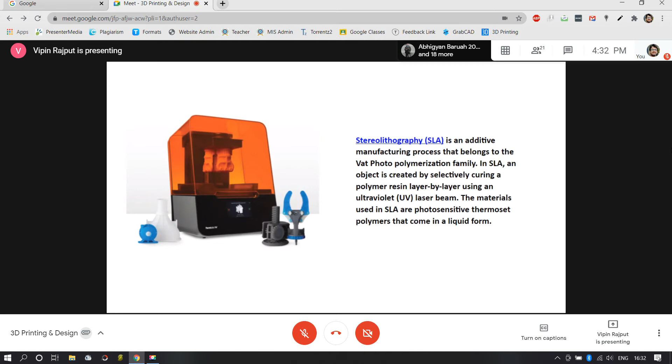Okay, move to the next slide. So there are three types of this technology. The first one is called DLP, or digital light processing. The second one uses a laser, and the third one uses an LCD screen.

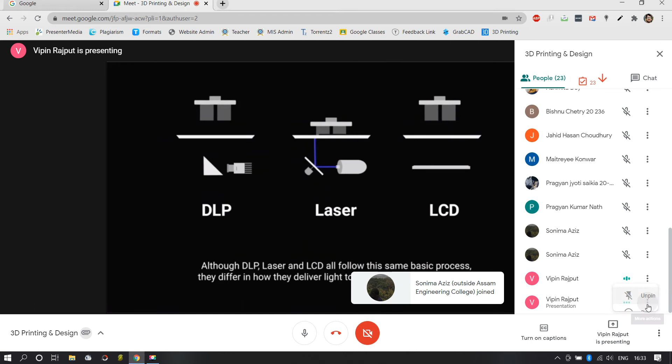If you see in the middle is Formlabs. Formlabs is the second technology, and that uses a laser. It's the same principle. There is a build plate on top. It goes down to the vat plate, where the laser cures the resin, and the part is formed.

The third one, the new machine you see, uses the new LCD screen technology. The same thing happens as with a projector or laser, but here the LCD screen makes the image. We use the pixels of that screen to mark the resolution. If you have a regular pixel display, you get a little less resolution, but nowadays LCDs come with 8K, 4K resolution, which is very fine. So sometimes it's better than a laser or a DLP.

Back to the presentation. So when we talk about the next generation of SLA technology, all these technologies have something common: when the resin tray, the build platform, goes down and resin is cured, they need a little movement to pull back the part, and sometimes that movement is not very precise, and the part will stick to the bottom of the plate. Hence it's a print failure.

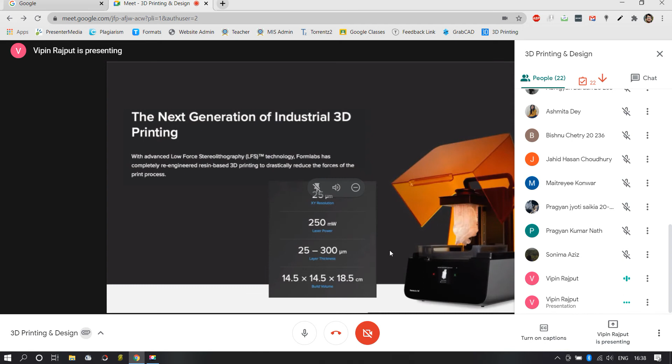We were saying that we have three types of technologies in VAT photopolymerization. When I say VAT photopolymerization, that means the particular process of SLA - a particular phenomena, a particular technology. So we'll begin with DLP, laser and LCD. These are the three of them and we'll study about them in detail.

It is common in FDM, in SLA, in SLS, or in DMLS. So whatsoever the technology may be, additive manufacturing is totally about stacking of multiple layers one over another in order to form a component.

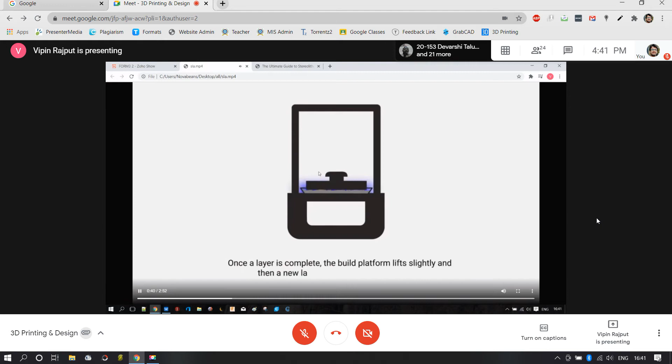So hereby you can see the basic difference as well as the only classifying factor between the three technologies in VAT photopolymerization. First we have DLP, digital light processing. Second we have laser, and the third we have LCD.

In case of DLP, what happens is we have a projector similar to that in a cinema theater. A beam of light is thrown from the projector to a mirror, and through that mirror, light is rerouted to the vat where the resin is poured, and simultaneously the composition takes place. So the source of light will be a digital light projector that throws light on the mirror, and further the formation takes place.

What happens in laser is we have a specific point size laser that gets rotated by means of galvo mirrors, and formation of the particular part takes place. Whereas in case of LCD, we have an LCD screen like mobile phones have - the light illuminates and the part is formed over the build plate. Everything in detail will be shown to you in this video itself.

Yeah, so was this clear? I mean, this particular video might have made you familiar about all the three aspects, right?

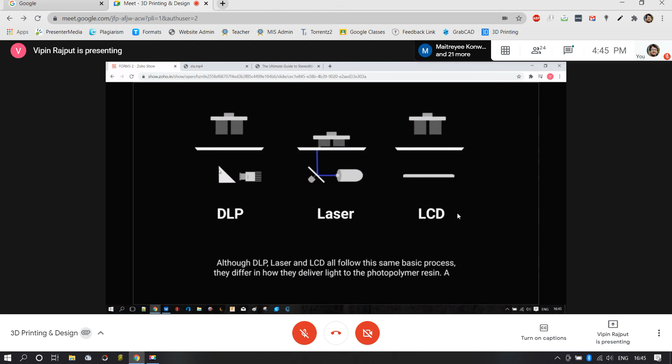Okay, so as we were saying, there was a major difference between the three - the DLP, the laser and the LCD thing. In this particular video you might have seen the basic difference, how the DLP process goes and how the composition takes place, and simultaneously for the rest of the two. Moreover, we'll study about the laser thing a bit more in detail, specific to a particular product. So I'll show you one more video, and thus we'll complete this particular presentation.

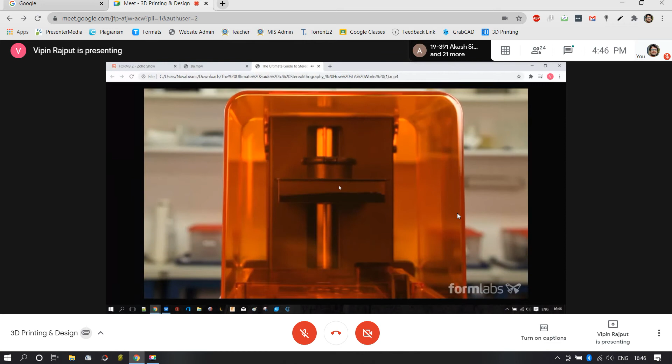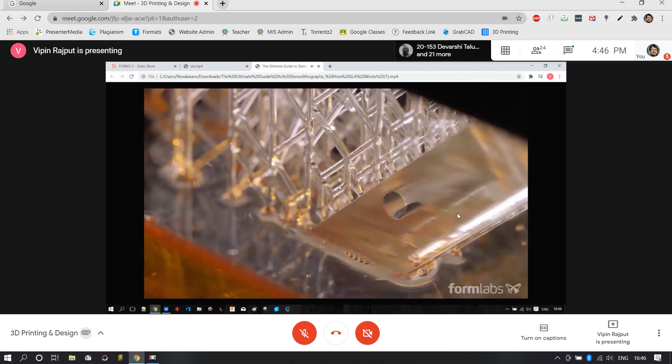Galvanometers direct the UV laser to the transparent window at the bottom of the resin, drawing a cross-section of the 3D model selectively hardened. The print is built in consecutive layers, each less than 100 microns thick. When a layer is complete, the part is peeled off the bottom of the tank, letting fresh resin flow beneath, and the platform is lowered once again.

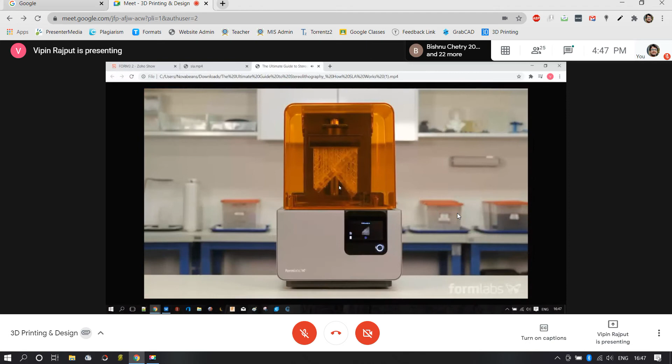Originally developed in the 80s, SLA was confined to large industrial machines until recently. Today, desktop stereolithography offers affordable, high-resolution 3D printing that fits conveniently in your workspace. SLA allows for the use of a wide range of materials with diverse physical properties. Whether you're an engineer, product designer, sculptor, jeweler, or dentist, there's a material for your application.

From this particular video, it might be more clear about the laser phenomena, how laser working takes place, and how vat polymerization through lasers takes place, right? Yes, sir. Yes, good. So we'll start off. We'll begin with the particular presentation. So we were talking about some of the aspects in vat polymerization process. So we'll just talk about some of the parameters.

So comparatively to FDM, SLA offers you a much more detailed print, simultaneously a lesser layer resolution. Okay. So when we say layer resolution or the X, Y, or Z axis resolution, that basically means the precision a particular machine or hardware is capable of giving you in a specified dimension, right? So when it is written over here as 25 microns in X and Y, that means X and Y resolution is 25. So in either X or Y direction, a feature of 25 microns is capable to be drawn by the means of laser. And further, its thickness will define how that particular feature will be propagated.

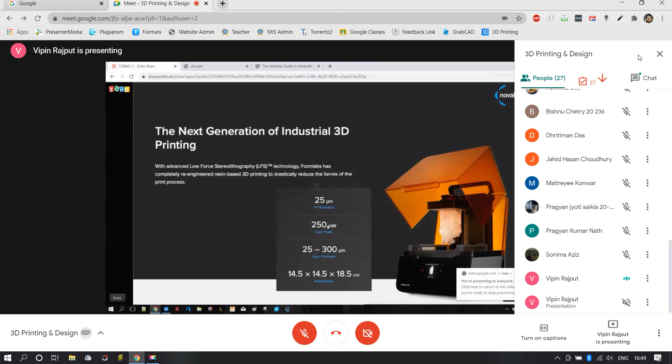Okay. Further, the equipment, as I showed you in the particular video, I'll just show you once again. Yes. So you can see just at the back of my side, this particular machine. So this is Formlabs, and this is an SLA based machine. And in the SLA based machine, the laser power is 250 milliwatts. That means a very low intensity laser is responsible for constructing the models. But the intensity of the laser does not define how critical or how geometric or how good the aesthetics offered from a particular machine can be.

And simultaneously, we do have n number of additional features available in this particular equipment. So layer thickness can be varied from 25 till 300 microns. But comparatively in FDM technology, you do have a greater provision. That means you can vary from 25 microns till 2000 or 3000 microns. That is 2 mm or 3 mm.

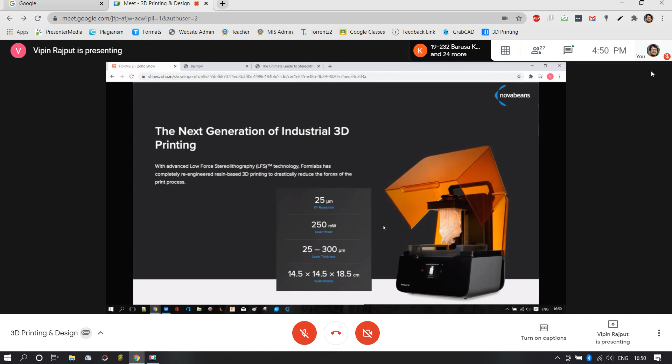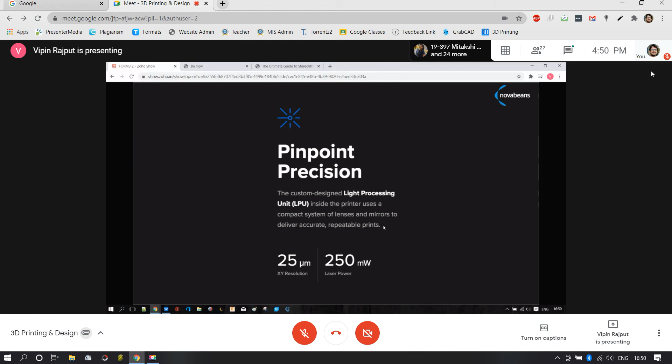Okay. Comparatively, the build area of SLA machines or DLP machines or LCD based machines, any of the vat polymerization processes, is comparatively low when we compare it to FDM or any other process. That means we do have a specified build area. So very complex geometries, very intricate parts are supposed to be generated through this technology. Yeah, as mentioned, the pinpoint precision, that means 25 microns is the XY resolution, and simultaneously the laser power is 250 milliwatts.

So this is how the entire construction happens, and there are mainly 3 accessories responsible for the construction of a model. So we do have our vat tray, our resin tank where we pour in the resin. Then we do have our build platform. This is the region where the model gets constructed. And at the back side of the machine is the dispensing cartridge, which actually holds the vat photopolymer, the liquid. So our process is very simple: design, print, and then post process.

So okay, I'll just ask you a question. Any one of you can answer this. So in case we design something and print it in FDM, as soon as the model is completed from the printer, what is the next step we will do? Any one of you can answer.

Remove the supports. We remove the supports. Okay. Then further? If it needs, we can do some sanding. Okay. So a similar kind of thing is being followed here also. I mean, you were exactly right.

So when we print something, let's say a particular model of ours is designed, we simply export it to the particular machine after slicing. And as soon as the print is completed, in SLA technology a bit more intricate post-processing is required. Okay, so we'll talk about it, but our operation goes like: design something, you have the STL or the OBJ file with you, your part is ready to be printed, it does not have any non-manifolds or glitches in it. Further, you are welcome to move your design to the printing portfolio.

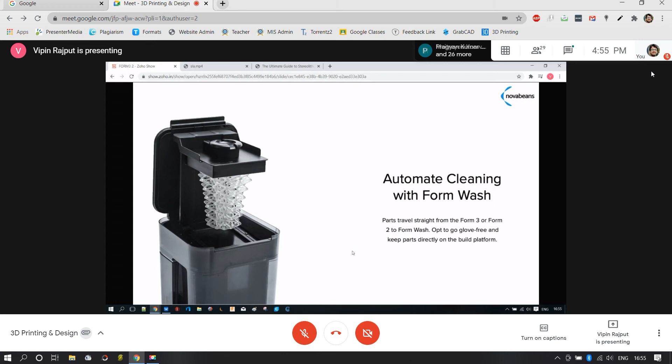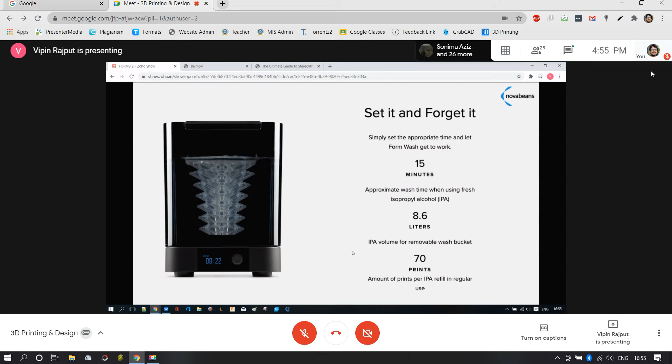So we do have a particular container, an automatic container. Whatever is printed, you can simply put inside the chamber, which has motors that create a swirling effect, and the part gets washed automatically. These are some of the specs of that container; I'll not go into detail about the specs. Further, we have a UV chamber where you can set the temperature as well as the revolution, that means how long it should rotate and cure the model, and thus it will yield a good quality print. Okay.

So, was this understood? Yes, sir. Yes, sir. Okay, so if any one of you has any queries, please feel free to ask.

So shall I proceed ahead? Yes, sir.

So I'll show you the interface of the slicing engine of SLA, what the interface is, and thereby what operations you can do over it. Okay. So this is how the platform of an SLA based machine looks like. This is the grid which shows you the printable area. Anything lying within this range can be printed. Anything exceeding this range cannot be printed.

Okay. So I'll just tell you what this software is. This is PreForm, the name of this slicing engine, and this is by the OEM Formlabs. Almost 90% of the manufacturers for SLA technology have their own slicing engines. But in case of FDM, it's not the same. 90% of the machines run on a single slicing engine, that is Cura. So you all might be familiar with Cura, right? Yes, sir.

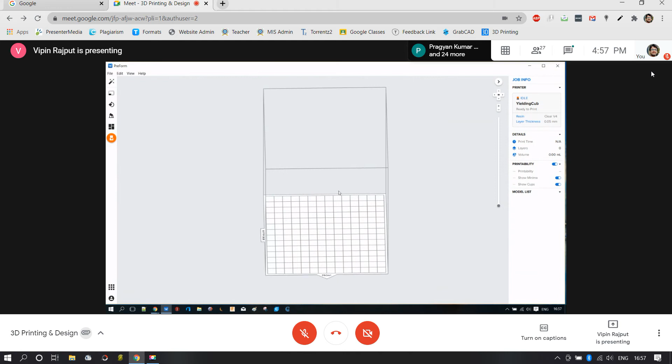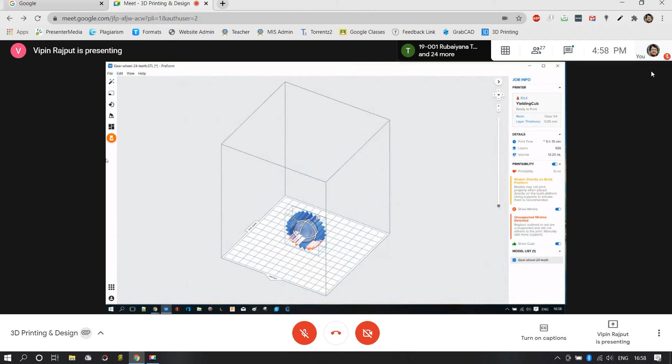Okay. So the operations are almost identical to what we use in Cura. The first thing we need to do is choose the location of the file. So I do have a particular model with me. Okay, let it be a gear. So the first and foremost thing you need to do is import a model. You can simply drag and drop the model, or you can choose the location of the model in order to make it visible over the print screen.

Then the second thing is to choose the material. As I said, the machine has n number of materials based on the application. If we may be casting it to make it an aluminum or iron type of compound, we can choose any of the castable materials. If this needs to be a biocompatible or biodegradable kind of compound, we could choose any of these two. Further, varying upon the application, we have n number of materials available. So I'll just choose any one of them.

Let it be black. Right now we have provision of printing at 3 different layer heights: 25 microns, 50 microns, and 100 microns. So we can print this model at different layer heights. Simultaneously, that will define our time too.

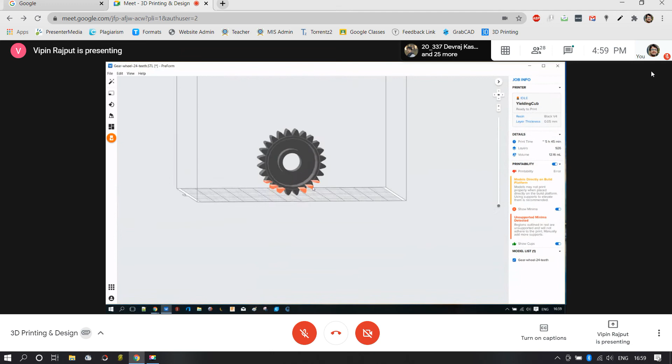Okay. So as we chose that parameter, here you could see some red marks, which show the overhang. If a model is not subjected to any kind of supports, it will fall. It gives us an indication that we need to provide supports. This is the same thing that happens in Cura. Even in Cura, if a model is overhanging, it will show you a red region. Am I correct? Yes, sir.

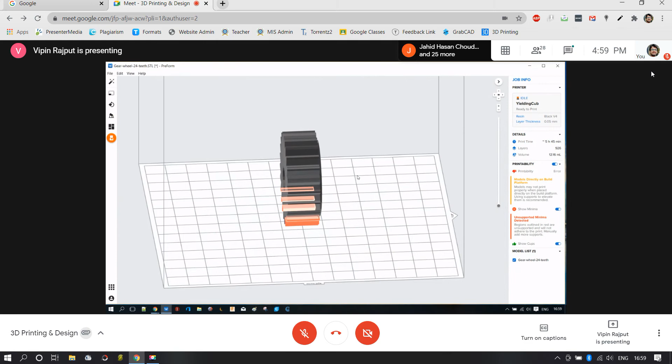So first thing is to import a model. Then we choose the material in which we want to print, and then choose the appropriate layer height. So let's say 50 microns was not even required for this. I'll not tell this. You guys let me know what should be the appropriate layer height for printing a gear. Is it required to print it at 25 microns or 100 microns, or will 50 do the work?

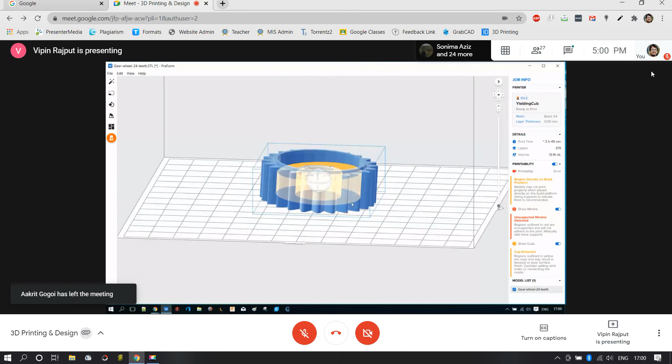Hello? Yes, sir. Yeah, I could see that 28 of you have joined, but okay, no worries.

So basically, the layer height totally depends on the aesthetics required in the model. When we talk about a gear, 25 microns is not at all required. Even 100 microns will do our work, right? So we'll choose 100 microns, and that will save a lot of our time.

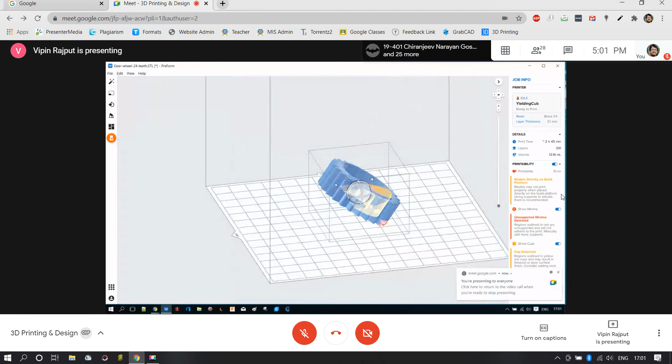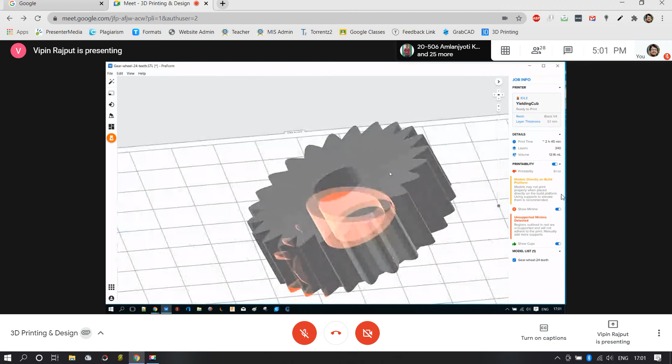So after choosing the material and the appropriate layer height, the third thing we need to do is orient the model in such a way that it may be formed properly. Simultaneously, it should not have a big quantity of supports generated on it. So the other parameter will be to choose the orientation of the model. If you feel comfortable with the disk to choose the orientation, you are most welcome to use that. But if you want to choose a particular base, we have n number of features available here too.

This is for scaling the model up or down. In case of SLA, you can scale the model uniformly. As you might have done in FDM, you could actually scale the model non-uniformly, meaning you can change either of the directions. But in case of SLA, it is compulsory to do uniform scaling.

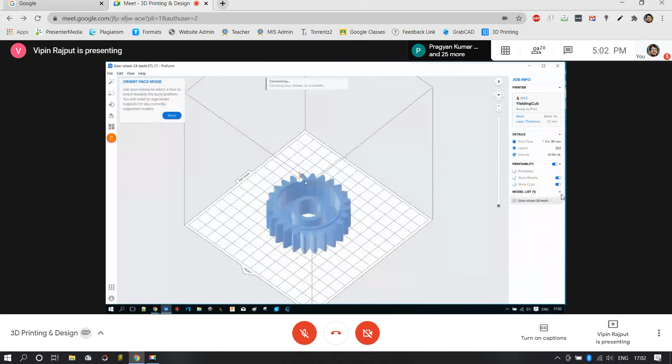Okay, so in case you don't want the scaling to be done, then you can actually design the model as per the dimensions you need. Further, we can choose the particular face on which we want to print this model. So let's say this is the appropriate face for me to print the model. Okay, so my model is something like this.

Okay, and further I'll just choose. So this particular feature is for scaling. Then this is for choosing the orientation of the particular box. Then this particular feature is for generating the supports. So let's say we are creating a full raft. Simultaneously, the touch point size will be 0.6 mm. Okay, so we'll just generate some kind of supports, and thereby we'll see.

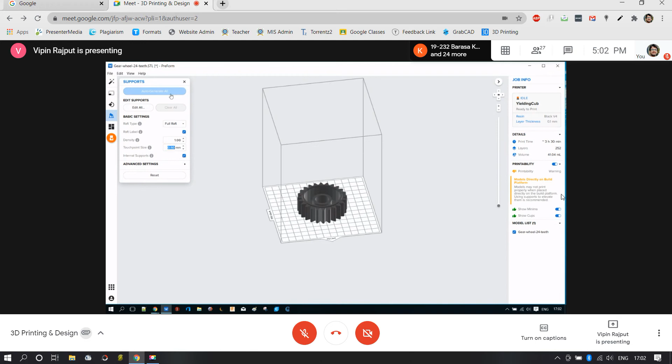Okay, so this model will take 4 hours and 30 minutes to print. Total number of layers will be 322, and the volume of resin utilized for the construction of this model is 51.28 ml. Okay, so when we say 322 layers, we'll just see the layer view for each and every layer. So this is how the construction of the raft takes place.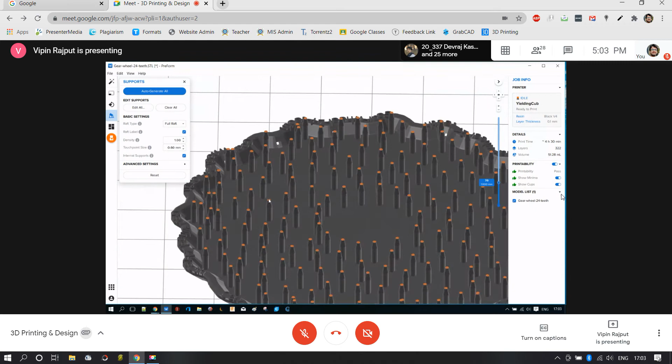So it will be very easy for us to remove the model from the platform. In case we had chosen something else, this would have caused us some problem. Generation of supports is happening like this, and the moment the part comes into existence, that means the point at which the initial layer of the model will touch down on the supports.

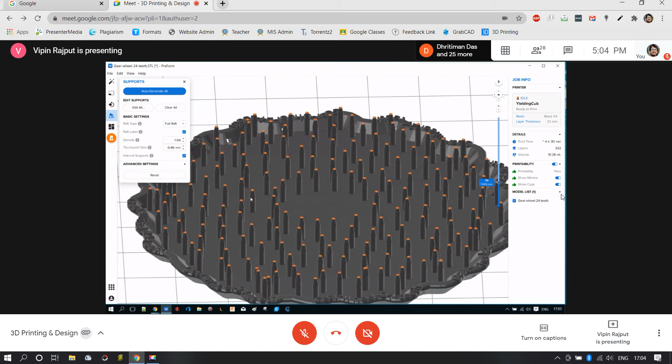So the diameter of this particular tip is defined by the value you have given here. So if it was 0.6 mm, the tip of this particular cylinder is 0.6 mm, and all the construction will happen over this. Likewise, each and every layer is 100 microns thick. We had provided 100 microns as the layer resolution, and the composition of 322 layers makes our entire model.

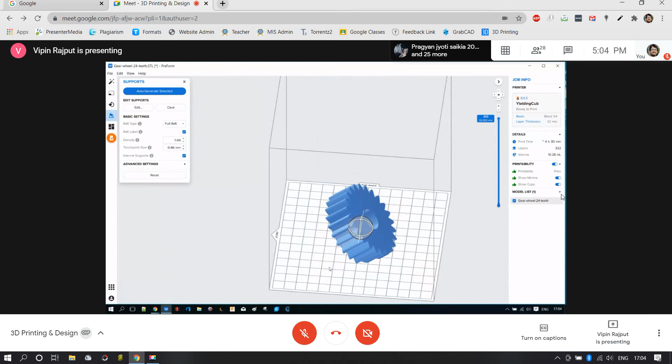Sir, when the slicer software is generating the supports, does it take into account the weight of the model? Weight of the model or width of the model? Weight of the model. Like heavier parts would need more support. Does it take that into account? Yeah. So basically, first of all, the thing that comes into existence is... Does it depend upon the infill density? Yeah, that's what I was coming to.

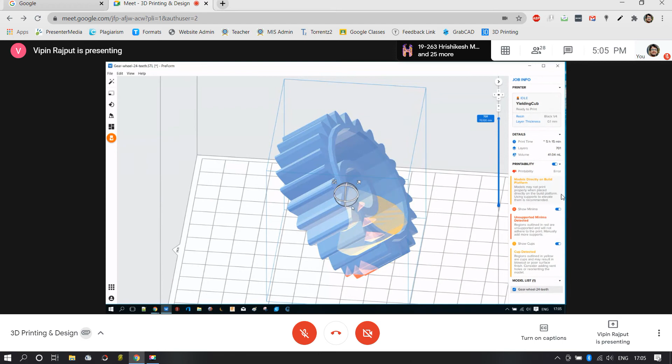So the first thing is, if you have a particular model, at the time of designing you should cross check the infill. Let's say you are not printing in FDM, because in FDM you have the provision of changing the infill. But in SLA, you do not have the provision of changing the infill of a body. It can be neither 0 nor 50 or anything. It will always print a solid body with 100% infill inside. You don't have the provision to change it.

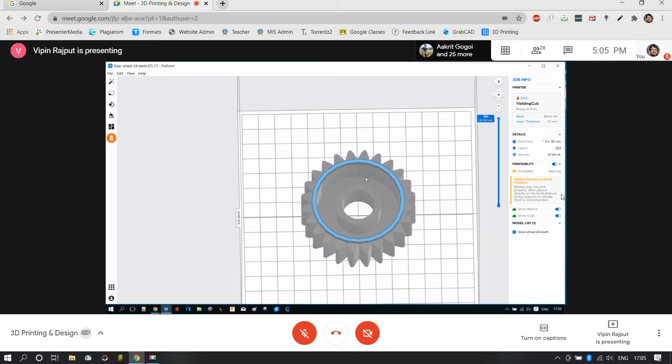So, coming to the other point. Whenever you want to print any model with SLA technology, it is always advised to create the model as per the requirement. So let's say you had this gear; right now this gear will be solid. All its flanges and teeth will be solid. But you don't require solid teeth. You just require a prototype, and you don't want any excess material to be wasted.

So what you can do is, at the time of designing, create the shell and leave the entire internal space hollow. SLA will not alter the geometry and composition in which the model is created. But if it is created as a solid object, it will definitely be formed as a solid object.

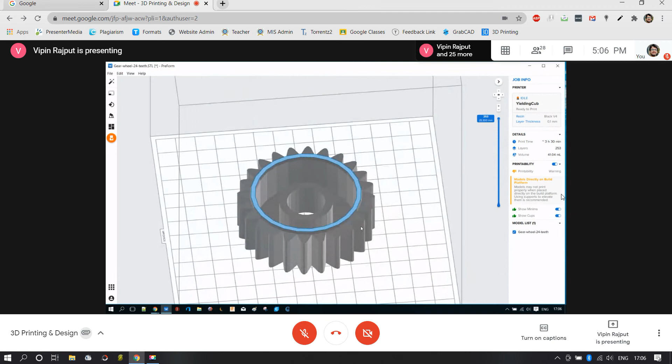Okay. And coming to the very first question you asked, that for a weighted model, supports will be generated automatically and so on. So yes, this type of provision is available in the software. So let's say your particular part requires a greater amount of resin to be used. Let's say the weight may be around 2 liters. So let's say the particular model requires 2 liters of supports to be generated.

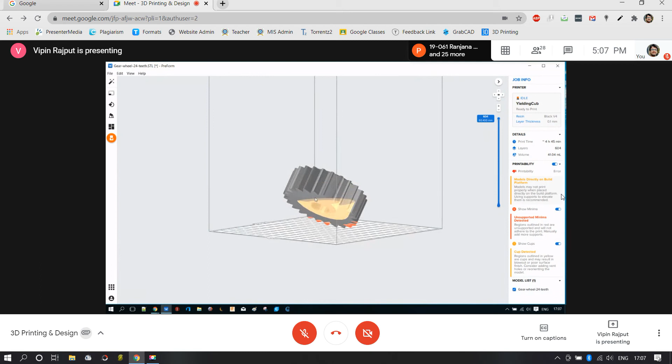So I'll just show you a visual. Here we go. I'll just scale this model. So right now we presume that it is big enough. Okay, we'll just move it somewhat more. So let it be 2.8. Okay. So right now, if we want this particular model to be printed, we'll simply choose this particular model. Further, we'll define the orientation on which we want the model to be printed.

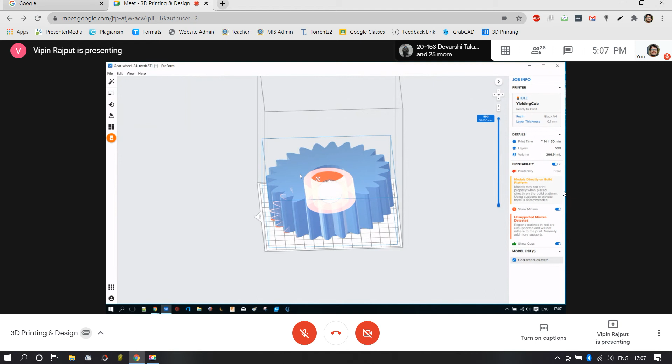You should not select the auto-generated orientation, because in case of SLA, auto-orientation is something which the software inculcates based on the periphery. It does not know about the structure, it does not know about the geometry or the intricacies of the model. Thus, it is always advised to create your own orientation in order to make sure that the model will be printable.

So what we do, we first of all choose the best orientation, and further we simply apply the supports. The weight of the particular model will always be shown in the menu bar. Any software will always show you the amount of resin being used in the composition of a model. So let's say right now this weight is 266 ml. Presume that it was 2669.1. That means 2 liters and 669 ml, close enough to 2.7 liters.

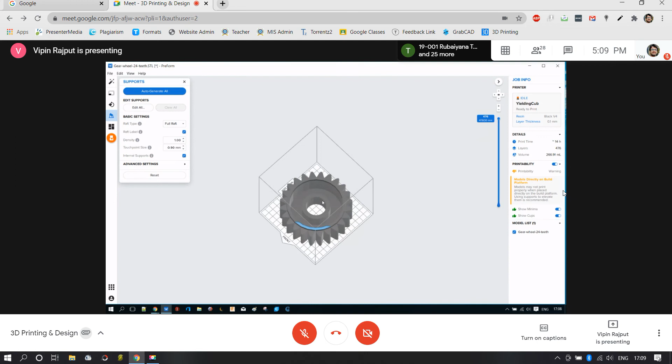So in that case, instead of giving the touch point size as 0.6 mm, because that is required for a lightweight model, you could alter this value and move it close to 0.9 mm. This particular touch point has the potential to hold a weight of up to 8 kgs, and more than that cannot be formed inside this particular machine. So the maximum possible weight inside this particular software is 8 kgs.

So it will vary as per the software and as per the machine, but it is not advised to use a touch point size greater than 0.9 mm. 0.9 is more than sufficient. As soon as I click on auto generate, it will automatically generate 0.9 mm touch point size supports over the entire model.

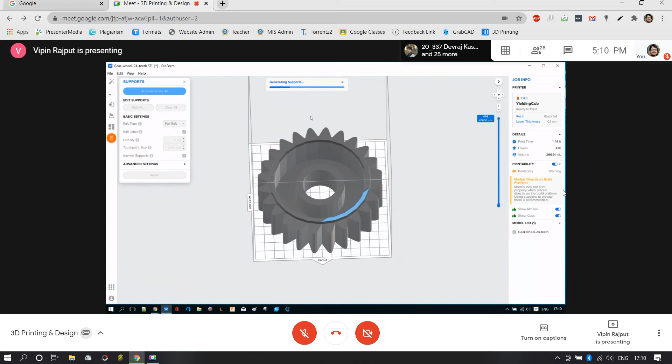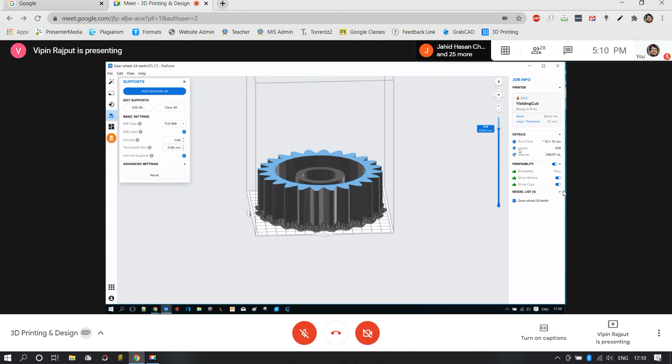So it's showing us 16 hours and 15 minutes to print. Number of layers is 546. Volume of resin being utilized in the construction is 299.97 ml. And this value is precise, accurate to 0.1 or 0.2 ml of resin. So no material will be wasted. Only the material utilized in the construction of the model is used.

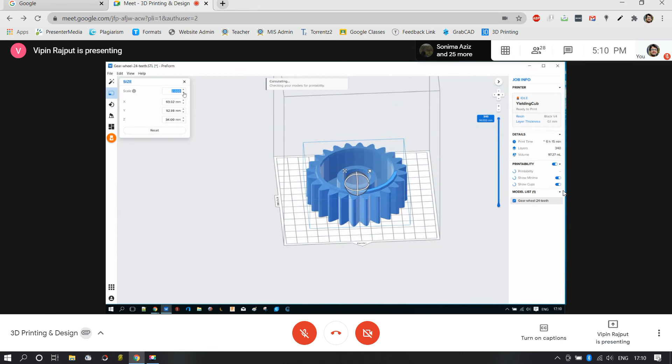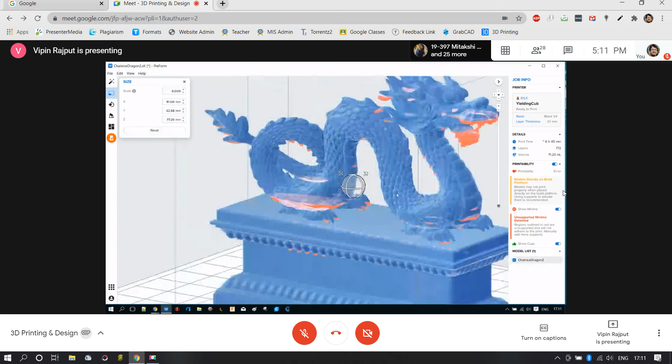Okay. So we'll just take some other model. This was a pretty easy thing. Okay, so let this be our model. So will the FDM process be able to print this model with the desired shape and size without distorting any single feature?

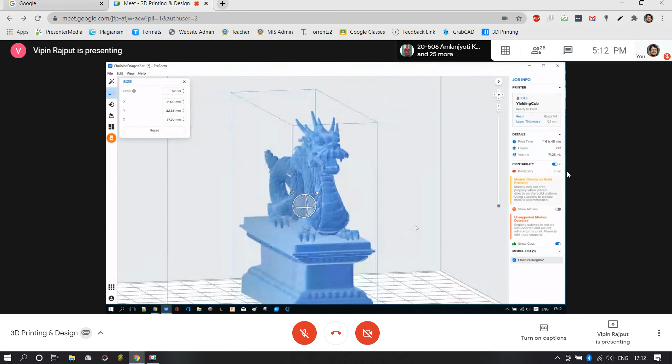The accuracy in the design will be less. Sorry? Accuracy of attaining the features will be less in FDM. Yeah, accuracy. Exactly. Accuracy will be very less. Detailing will be less. But you didn't hear my question properly. I asked, will the particular technology be able to create all the features properly?

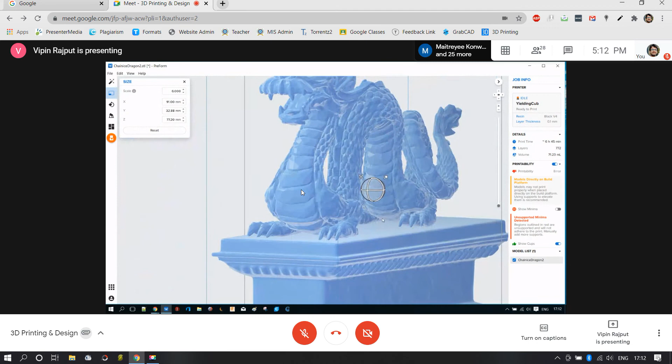Let's say this particular feature is formed, but the accuracy will be less. It may have some blurriness, or it will have some excessive marks over here. But what about all the features? Let's say it has a small rock kind of composition. It should have all the compositions inside as well as outside. Will FDM be able to form such aesthetics? Sir, since you're asking, my answer would be no.

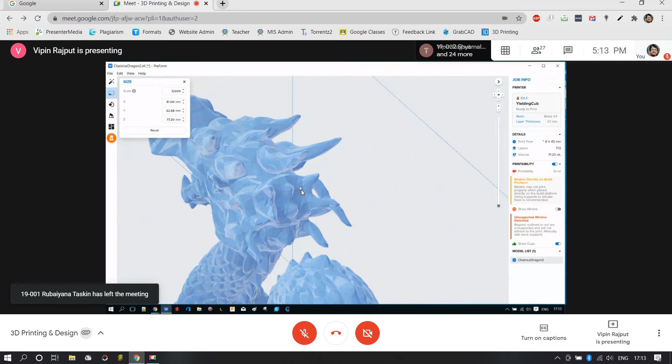Yeah. So definitely FDM has its own limitations. It cannot exceed its limitations. It cannot go out of the box to print something. The reason why the FDM process will not be able to form all the features, and SLA will be able to, is that in FDM the melting of the material happens, the print head moves all around, and the deposition of the material takes place one layer over the other.

So let's say you have the provision of using a minimum nozzle diameter of 0.25, let's say 0.2. Okay, so the extrusion, the material coming out of the nozzle, has a diameter of 0.2 mm, right?

If you do have a geometry with a dimension of 0.5 mm or 0.1 mm, in that case it will not be able to form that component in its own shape and size. It will experience distortions, and that's the reason why it is not able to form a particular object beyond its dimensional accuracies, beyond its dimensional limitations.

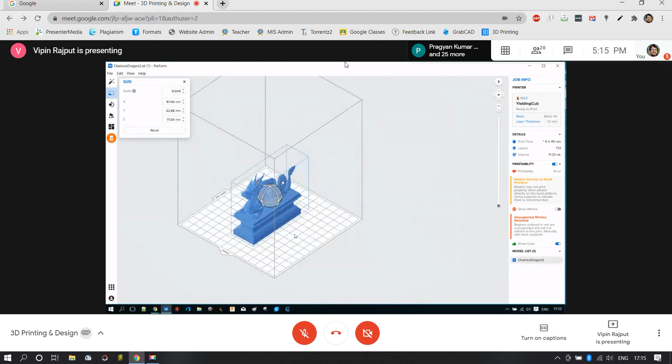So that is the reason why SLA is used over FDM in the industries where intrication and dimensional accuracies are a must.

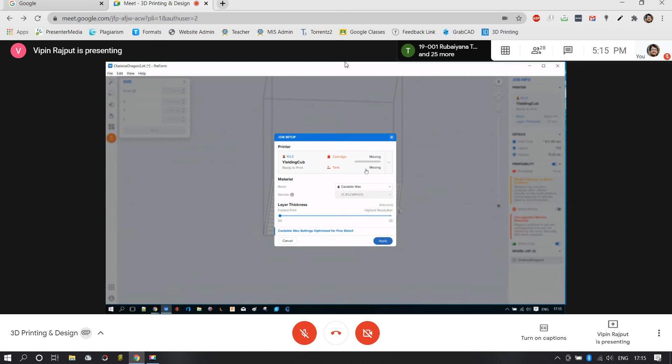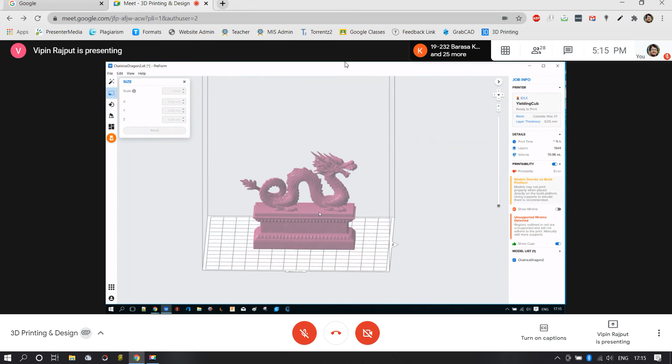Let's say we had this particular model and we wanted it printed in a castable material, so it is supposed to be casted, and we want this model printed inside our printer in gold. So what we can do is simply print it in castable material. After the printing is done, we'll wash the model. As soon as the washing is done, we'll cure the model. After curing, we'll remove the excessive supports and sharpen up the places where we need good aesthetics. Thus, our model is ready to be casted.

As soon as the print is ready, the casting person will use this model as a mold, depending on what kind of casting he is doing, investment casting or sand casting, and directly the molten material will be poured over this piece. This material will be burnt and evaporated through a hole, and the rest of the gold will form the structure of this particular model.

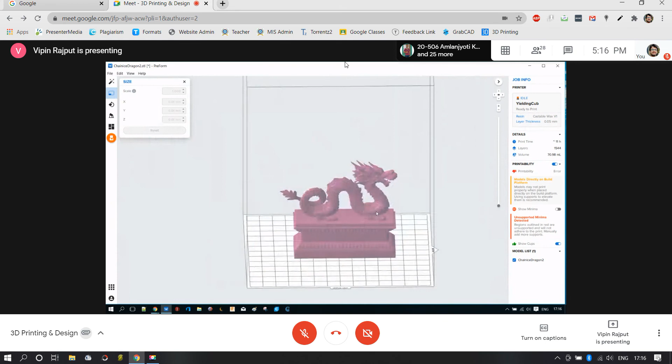I'll just go through some of the additional features of the particular software that you can experience in SLA.

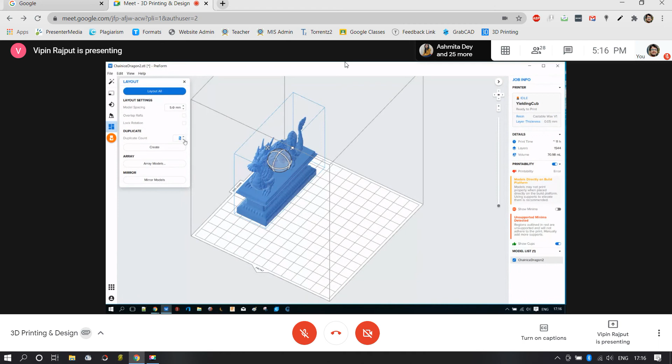So model spacing - this is a similar feature to Cura, meaning what should be the minimum space between two models. Then there's creating duplications of a particular model. Let's say you wanted 3 of them placed. So now you have 3 additionals being replicated over here.

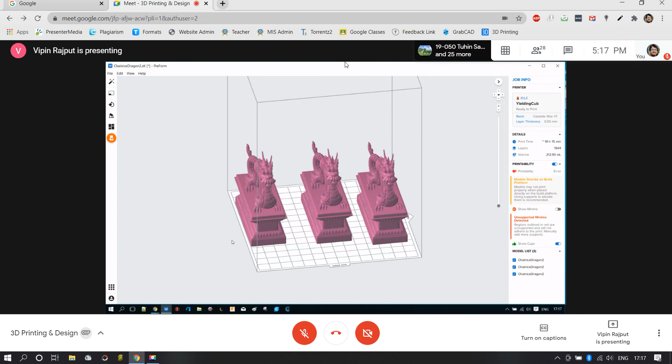The software for SLA is much simpler and less intricate compared to FDM. The basic difference is, in this software you won't experience infill or shell compositions - you only have the provision of layer height. Simultaneously, the multi-material kind of thing is not observed in SLA; you can only use a single material at a time, whereas in FDM you can use 2 different kinds of material at a time. In FDM you can experience a multicolor model, but in SLA you can only experience a single color model based on the application, based on the resin color.

And thus, you're ready to go.

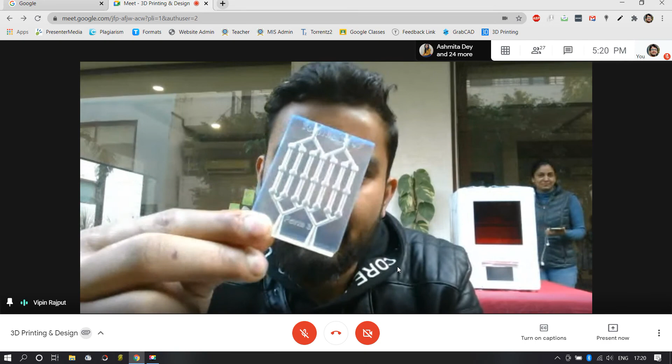So this is a specific model being printed from SLA technology, made up of clear resin. It's not exactly 100% optically clear, but it is optically translucent in nature, and thereby we have micro channels inside this model. The size of the micro channel is 100 microns, meaning the passage going through this channel is 100 microns. As I mentioned, SLA technology is used for very intricate and complex geometries, and in this model we can experience the same.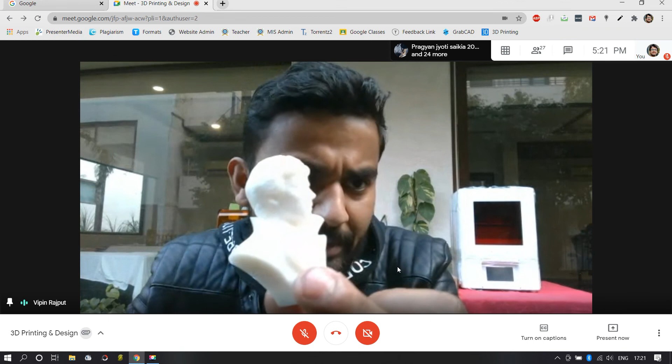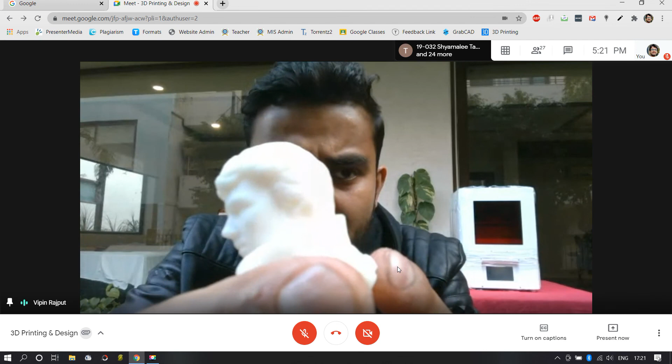So parallelly, I would like to show a particular model. This is a Sherlock Holmes model being printed from an SLA printer, and I would like you to gain some of the aspects from it - just check the features available in the model. As I was mentioning, some of the limitations of FDM are always available. This is one of the limitations - it is not able to provide such good aesthetics.

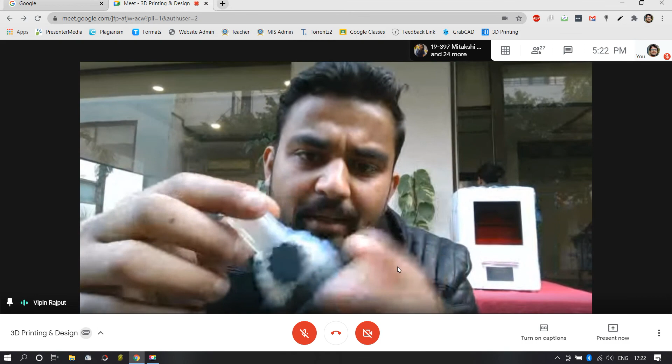Talking about engineering materials, let's say we have a pump and we require the integrated part to be printed in different parts and then assembled together to form an assembly. So we have printed this part in different materials. The housing is printed from a different material, the suspension assembly is printed from a different material so that it is flexible in nature - we can always press it and pull it. And the knob is printed from a different material so that it may be durable and may not distort within time.

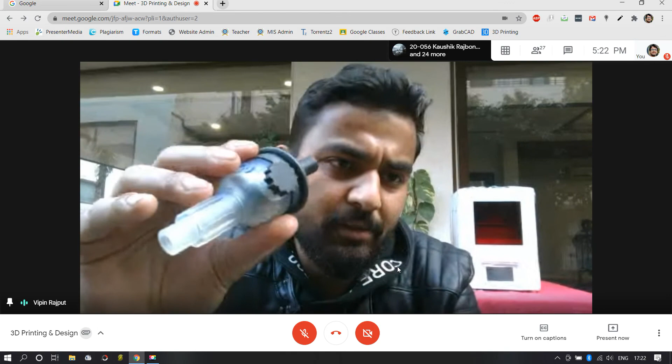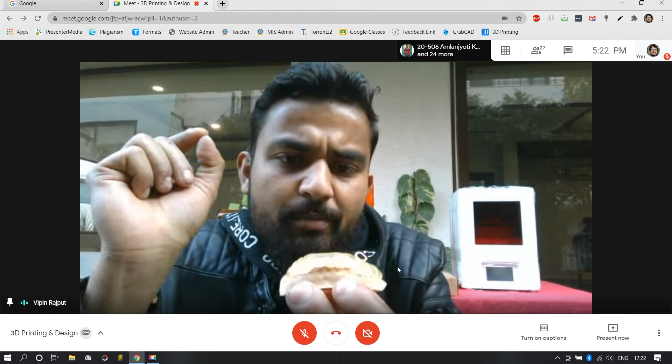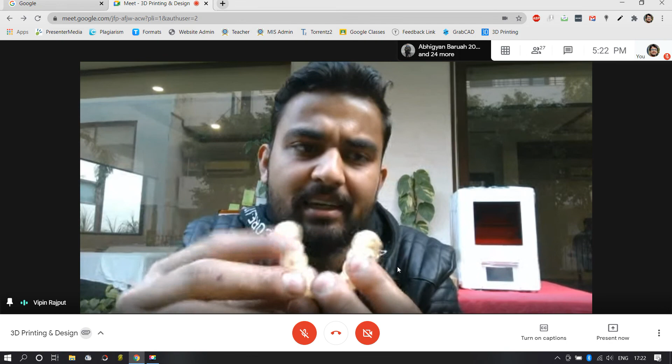I had mentioned about versatility. This is one of the other versatile aspects - this is made up of biocompatible material. This is an aligner, a dental model, and these are the aligners. This is a surgical guide - before any operation, doctors usually use this inside the mouth to perform the procedure. Let's say if a hole has to be made inside the teeth, the doctor will put this surgical guide over the patient's impression and perform all the operations. This is biocompatible as well as biodegradable compound.

Then, desirable for engineering applications - let's say if a particular compound will be experiencing high amounts of stress and strain, and thereby will experience a large amount of heat generated between the two. We can actually print the part in a compound that is sustainable under the varying load which is being subjected to the model. And thus it is advised to print the specific model in a specific material so that it could withstand the amount of pressure and load it has been exposed to.

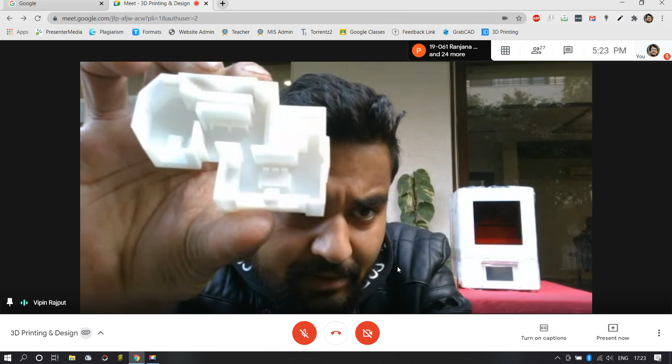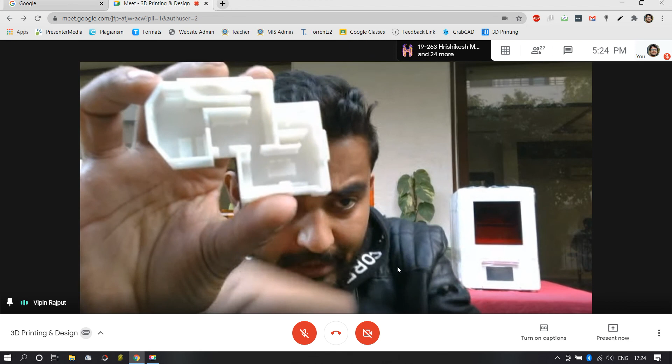Talking about aesthetics, this particular technology requires very little amount of support to be generated inside the model. Just check the features of this model - this is an architectural plan, and it has not been printed with any supports. This entire structure was printed without any kind of supports - it has stairs, a table, chairs, the almirah, the backdrop, everything. That means this technology is very profound and proficient enough to print any of your applications. The only thing is your design should be compatible enough, your design should be apt enough for printing, and simultaneously you should have a good idea about the materials available for printing.